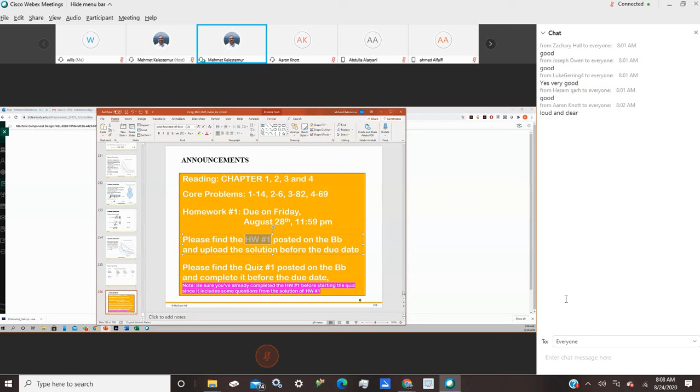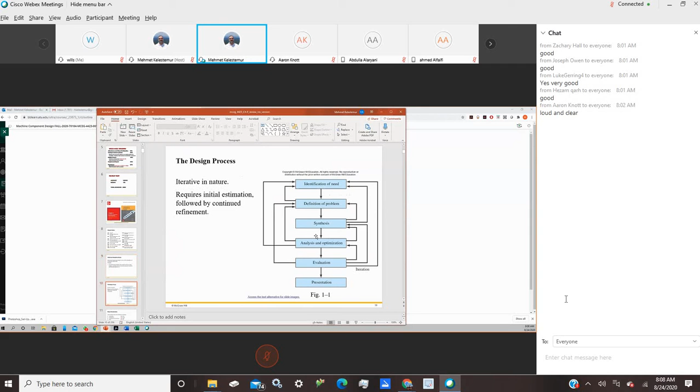Last time we started reviewing chapter 1, and we talked about what is design, the design process and design considerations. We talked about computational tools, acquiring technical information, and we mentioned some useful internet sites and organizations. Those are especially for the standards and codes, which are important when we talk about the components themselves. For example, bearings and gears already have codes and standards, and those are determined by some of the associations.

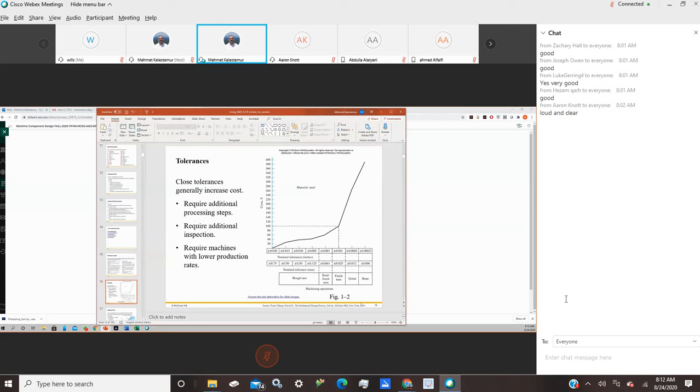So when you look at the, let me make it bigger. Okay, cost changes with the tolerances. And what we see here, this is the area, and in that particular level, let's say we use only rough turn, semi-finish turn, or finish turn. Those are the kinds of machining. So if we are not going beyond that one, then those are very rough machining operations, and the cost is low.

But if you go with grinding and then honing, then the cost increases drastically. The reason is you have to spend too much money on these machining processes. For example, engine cylinders, internal combustion chamber cylinders, need grinding and honing, and that's why they are expensive. But if you are using a component where the surface finish is not really important, unlike in an engine cylinder, then we don't need perfect finishing on that part, and therefore we generally see most machine components machined with those low-level operations.

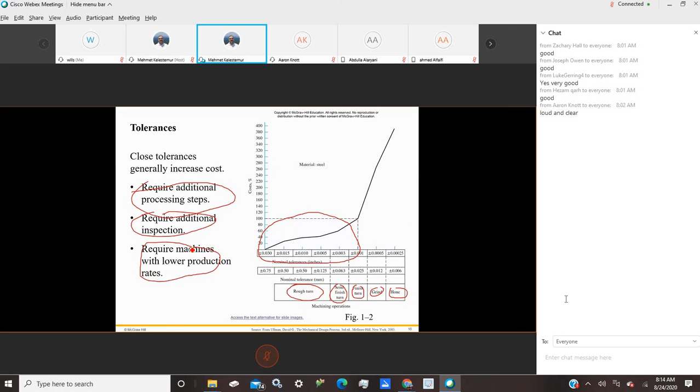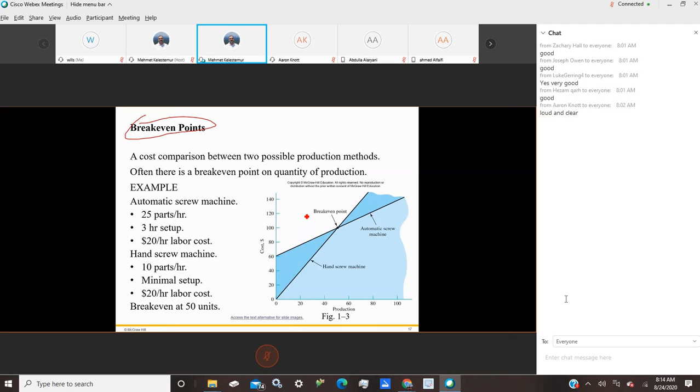And they require additional processing steps, additional inspection, and machines with lower production rates. So close tolerances generally increase the cost. That is one of the important rules. And another rule, break-even points. In manufacturing, we need to know how many parts we are going to produce or need. If the number of parts is not very high, then we don't need automated processing. Manual processing is enough.

So in this graph, what we see is the cost and the production, and in this,

could you turn off the mics? Okay, thank you.

That is the relation between cost and production, and this is an example for a screw machine process. Up to 50 parts is the break-even point. So until 50 parts, the hand screw is better. But if you need more than 50 pieces, then automated is going to be better. So there is always a break-even point in production, depending on the number of pieces. So that is another important issue in terms of the cost of that component.

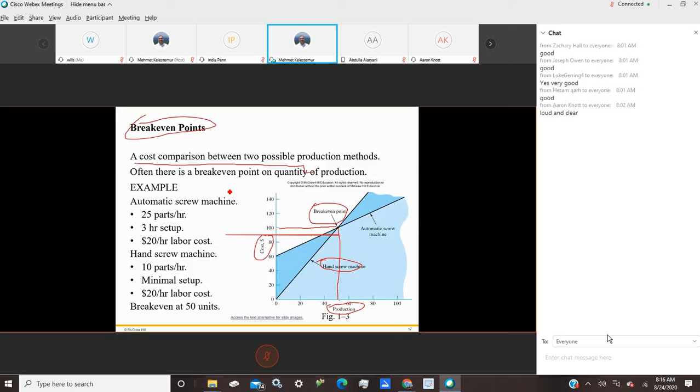And safety and product liability. This is another issue in design. The strict liability concept generally prevails in the United States. It is very important, and it is maintained by some regulations. This is very, very important. The manufacturer is liable for damage or harm that results because of a defect. So you need to provide the maximum liability for what you are actually producing.

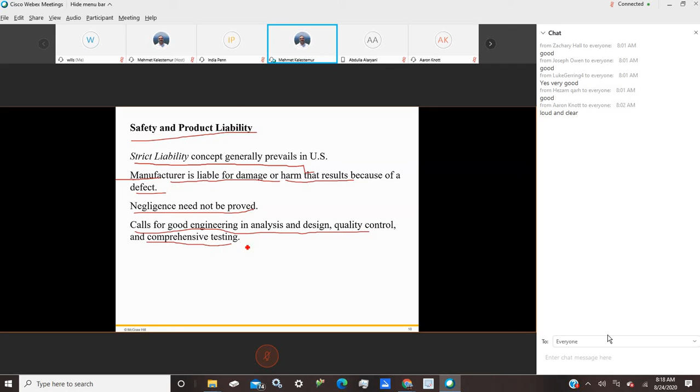Negligence need not be proved. It calls for good engineering analysis and design, quality control, and comprehensive testing. That means we always need engineering for any product. So it is not correct to make any design by trial and error. We need earlier work on that design and some analysis: material analysis, stress, strain, deflection analysis, and cost analysis. But in terms of safety and product liability, we definitely need stress and strain analysis to be sure. And this is very important.

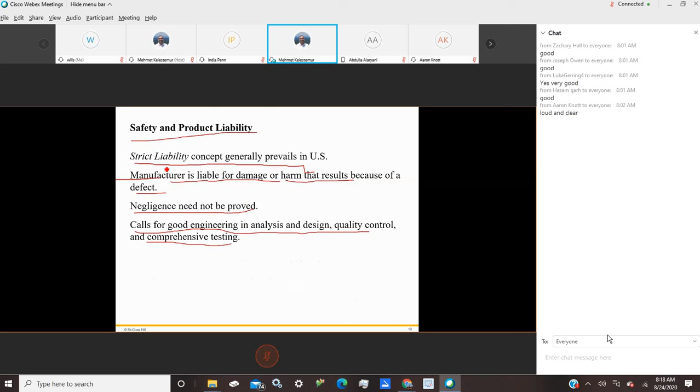Another two terms: strength and stress. Sometimes we confuse these two terms.

We intensively use these two terms. What is strength? Strength is an inherent property of material or a mechanical element. That means every material, for example steel or aluminum, and the type of steel or aluminum, every material has its own strength. That sometimes depends on treatment and processing, the way we are manufacturing this material. Those are all affecting the strength of the material.

It may or may not be uniform throughout the part, but generally in our analysis we assume it is perfectly done. In many analyses we say this is isotropic, a homogeneous material, meaning uniformly distributed, that all properties are the same in all directions. That is a kind of assumption. But in real world, nothing is perfect.

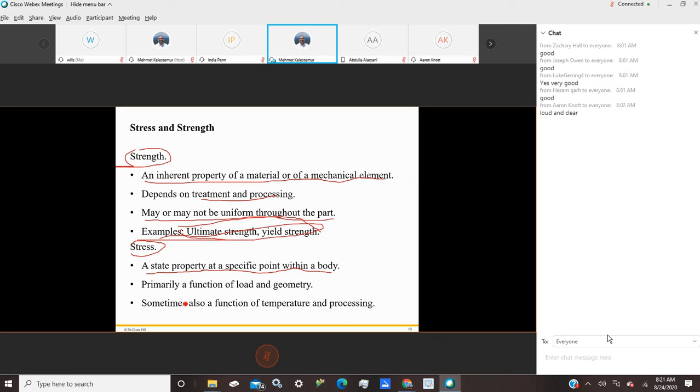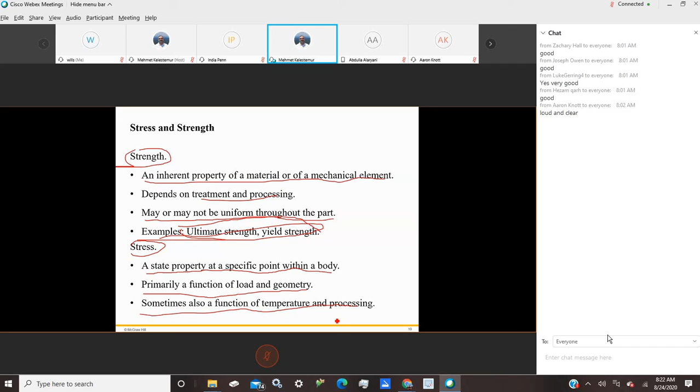Stress is a term we use, a state property at a specific point within a body. Let's say you have a piece of bar, a steel bar, and it has a strength, let's say it is bearing 100 megapascal tensile strength. If you are applying like 50 megapascal, that means that is the stress you applied, but the strength of the material is 100. So the stress is a state property at a specific point within a body, primarily a function of load and geometry, sometimes also a function of temperature and processing. This is defining what stress is.

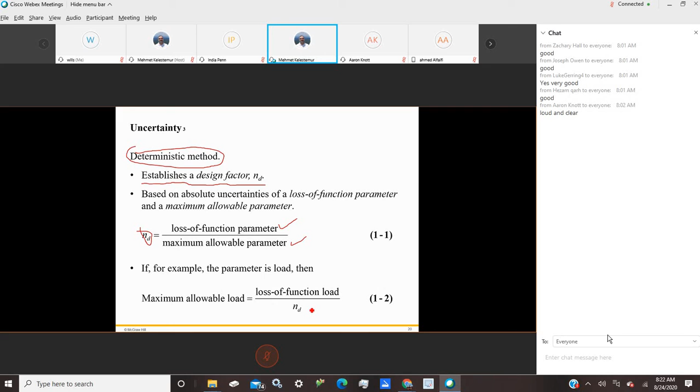There is always uncertainty, as we said earlier. One approach is the deterministic method, and the other is the statistical approach. Generally we use the deterministic method because we don't have enough data about those situations. The deterministic method establishes a design factor ND, which is the loss of function parameter divided by the maximum allowable parameter. For example, if the parameter is load, then maximum allowable load equals loss of function load divided by ND. This is the design factor.

The safety factor is another term we generally use interchangeably with design factor. The factor of safety is the realized design factor of the final design, including rounding up to the standard size or available components. We use factor of safety interchangeably with design factor, but there is a little difference. The factor of safety is the realized design factor of the final design, considering every aspect of the loading, so that is going to be final.

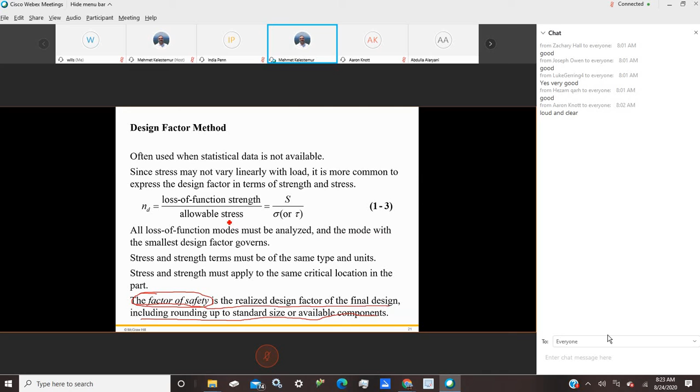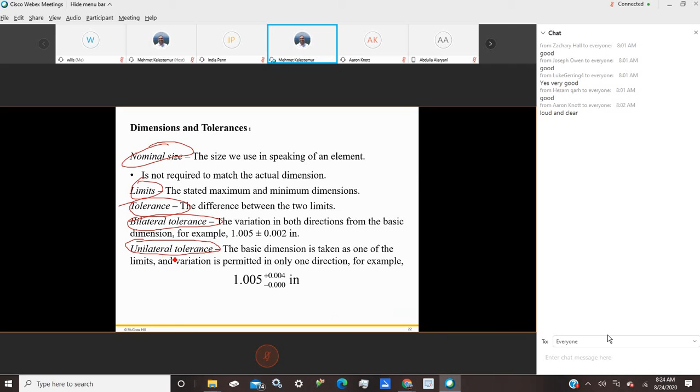Dimensions and tolerances, there are some terms in this part we need for later sections. Those are important: nominal size, limits, tolerance, bilateral tolerance, unilateral tolerance. We are going to use those, so please look at these terms again and remember them.

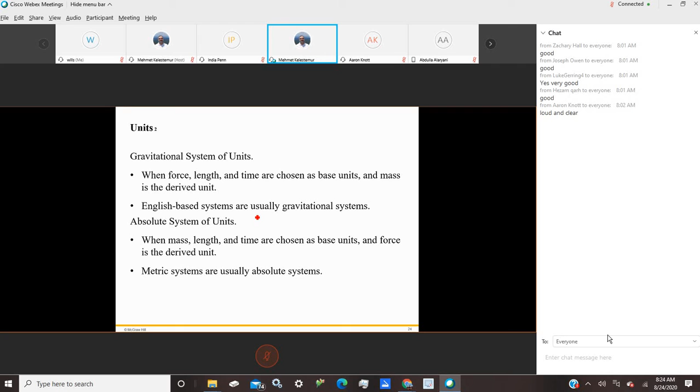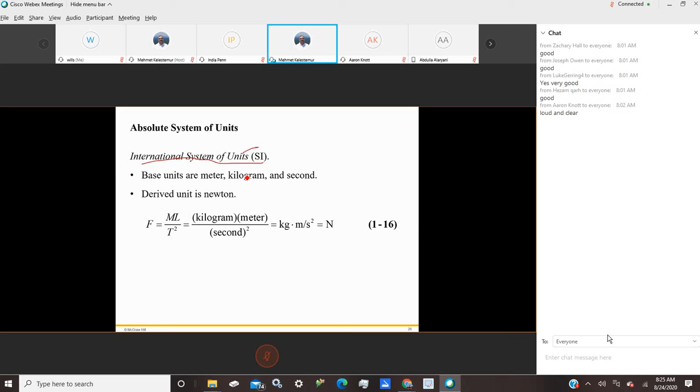And the units. At the end of the first chapter, we have two unit systems we are going to use throughout the book: the SI system and the customary system. The international system of units, which we call SI, has base units of meter, kilogram, and second. The derived unit is Newton, and the other parts are derived from that.

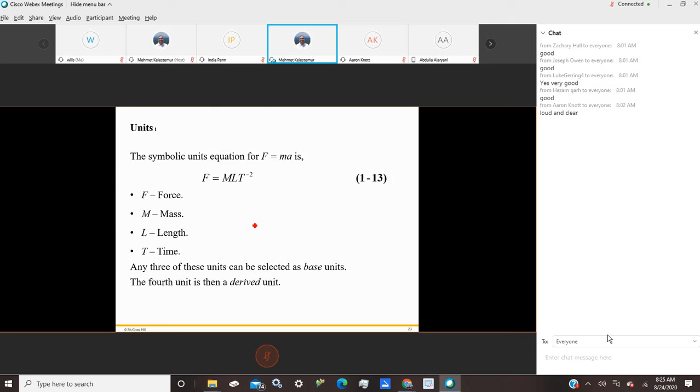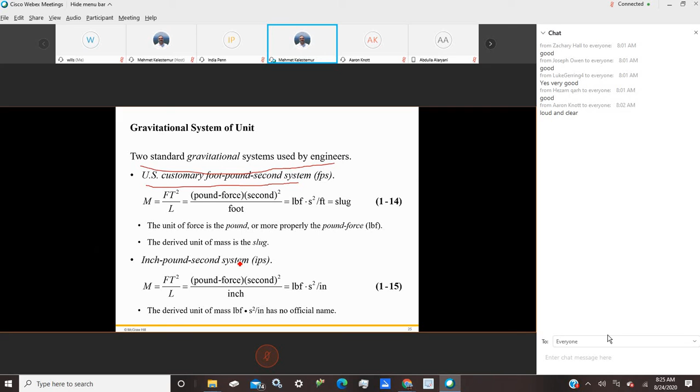The second one is the custom unit system, the US customary foot-pound system, which is the standard gravitational system used by engineering in this approach. I believe you are familiar with those things, please remember those as well. We are going to use both of them throughout the book.

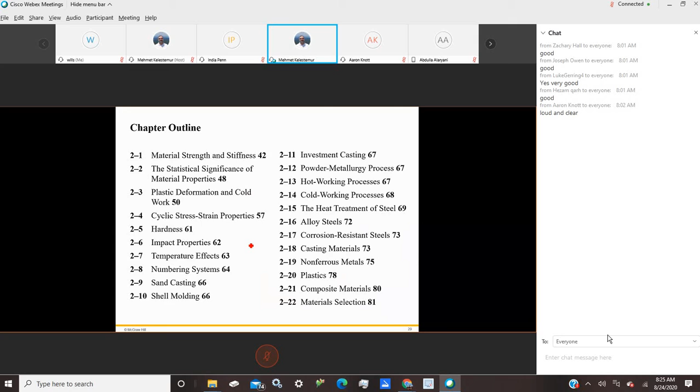The second chapter talks about material. As I said, in design issues, in our analysis, the first part we look at or consider is in terms of the material. So what should be the material point or criteria we need to know? In this part we learn the basic terms and parameters relevant to materials.

Generally we start with a tensile specimen. Tensile test is one of the common tests we apply to any material, might be polymeric material, metal, or ceramic. Those are the values or data we collect with the tensile test, and we determine the ultimate tensile strength of the material, the yield strength, the toughness, the resilience, or whether it is a ductile or brittle material. That information comes from the tensile test, and for the tensile test we need to know what are the...

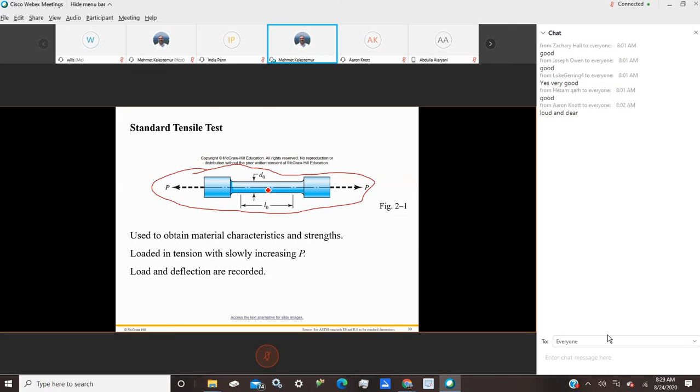Actually, in an actual test, that should change, because you are extending, you are applying P onto the specimen, and you expect there is going to be some contraction on the cross-sectional area. But if you are not considering that, and always keeping it the same as the original cross-sectional area, we call it engineering stress.

So that is engineering stress. If we consider it is not the initial area, it is changing, let's say to 9.8, a little bit less than the initial cross-sectional area, then I say this is something different than engineering stress, and I call this true stress. True stress and engineering stress are different from each other.

Generally, if you consider the stress strain curve, and if you are in the elastic region, it is good to consider the original cross-sectional area. But if you are working in the plastic deformation side, it is considerably higher, so you cannot ignore the momentary cross-sectional area. You have to always look at what the cross-sectional area is momentarily, corresponding to the stress level.

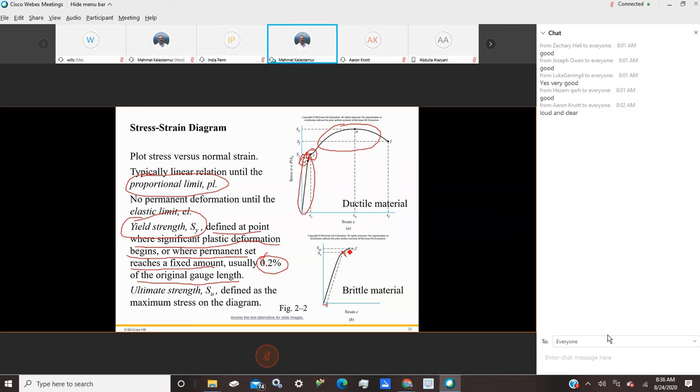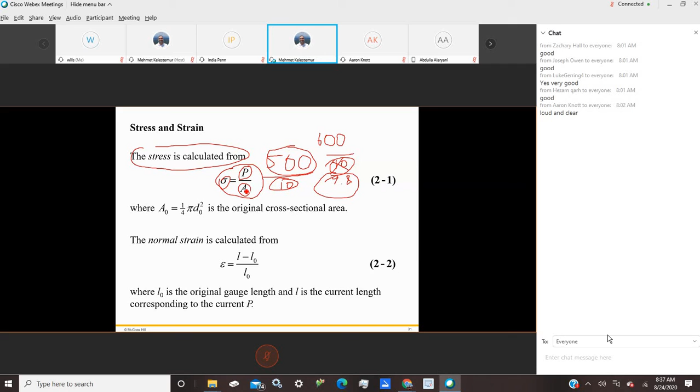So if you put this 0.2% here and draw a line parallel to this change, eventually it will cross, it will intersect the curve. So this point is defined as the yield point, and the maximum point we obtain, we record, that is called the ultimate tensile strength point. So here it is the ultimate tensile point for this curve. Actually, this point is having much higher loading, but as we define engineering stress and true stress, if you consider always the original cross-sectional area, it is going to be something like this.

But if we are going to consider what is the momentary cross-sectional area, then that is going to be the true stress versus engineering stress. This is for original cross-sectional area, this is for momentary cross-sectional area.

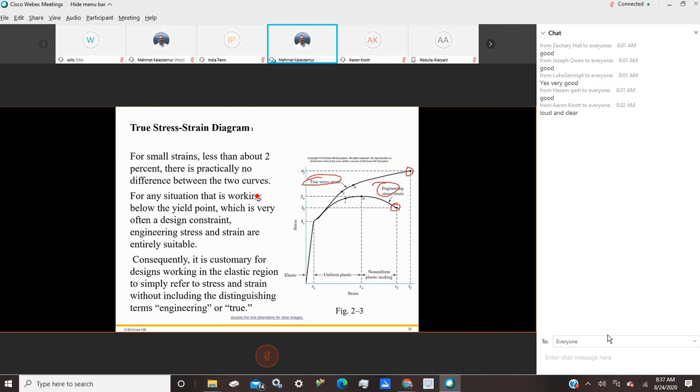And the equations here, what we use: sigma equals P over A0, where A0 is the cross-sectional area and P is the applied load. If it is a round specimen, then the cross-sectional area is 1/4 pi d squared. It is not necessarily a round specimen, it might be a different triangle, square, or rectangle. So if you have a rectangle specimen, then you need to again define what is the cross-sectional area for that one. So this formula is good only for round specimens.

And the strain is defined as the final length minus the original length, the difference between before and after loading, divided by the original length. That is called strain. So therefore there is no unit for this one, because it is length divided by length. So the strain does not have a unit, but this sigma, that is P over A0.

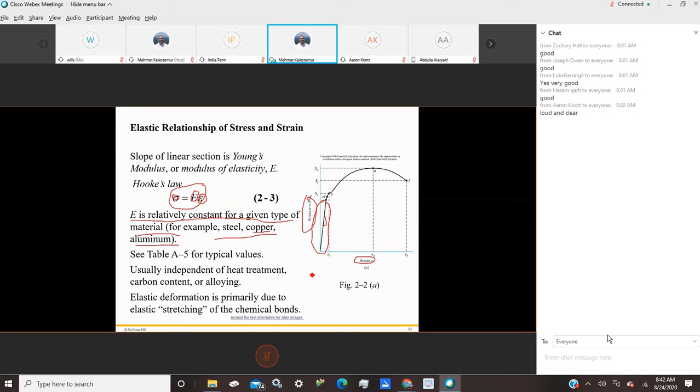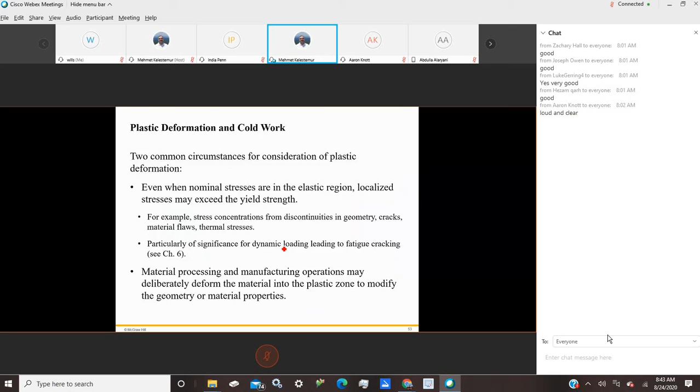Another important issue here, which we are going to use in our calculations, is stress or strain hardening. Sometimes we call it work hardening. So if you are applying some stress and you are over the yield strength of the material, the yield stress, then imagine this one.

So you are extending the specimen and you are exceeding the yield strength point, and then coming to one point that is not still the ultimate tensile strength of the material. At that point, you remove the load. When you remove the load, you have some permanent deformation, but the material tries to go back to its original shape, but it cannot because there is some permanent deformation. So this is going to be plastic deformation, and that is the recovered elastic deformation.

And if you try to have the same tensile test on the specimen that already had some tensile test, it is actually not the same one as the original, because we induced some plastic deformation on this material. We created some permanent deformation on this material. So when we pull this material again, the yield point is not going to be the same as the earlier one. So we call it cold work, or strain hardened, or hardening of the material.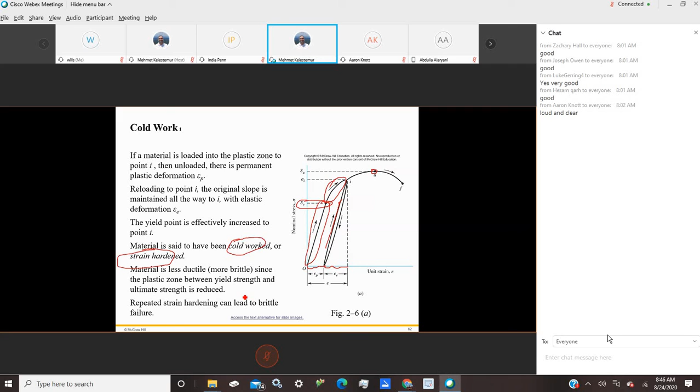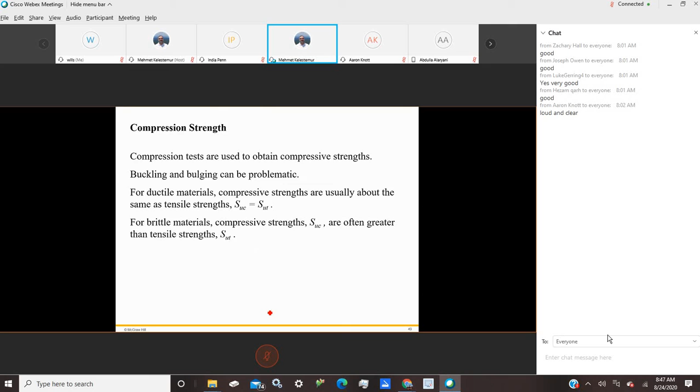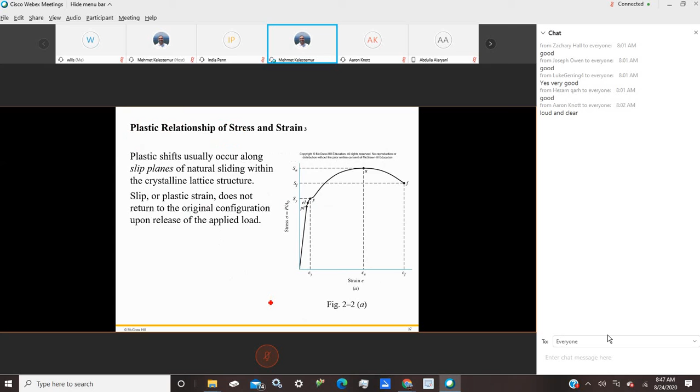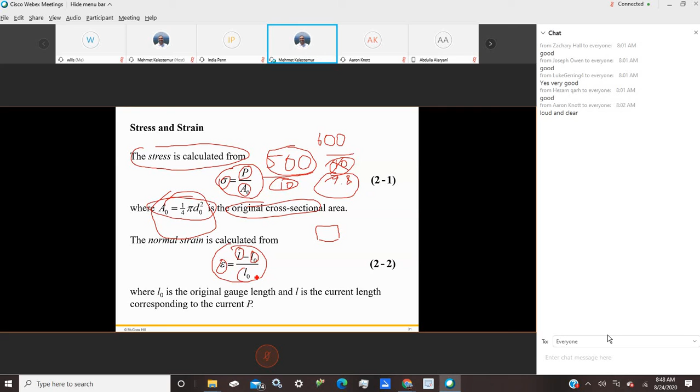So it is also associated with the motion of dislocations, as we talked about the plastic deformation of material. In that part, we need to remember also what is the true stress and true strain. I partially talked about that, and the momentary cross-sectional area is considered. So true stress is based on the actual area corresponding to the current P. And true strain is different than the engineering strain. Engineering strain is already defined here as L minus L0, the difference between the length before and after the applied load, divided by the original length. True strain is ln, the logarithm, of L, the final length, divided by L0, the initial length.

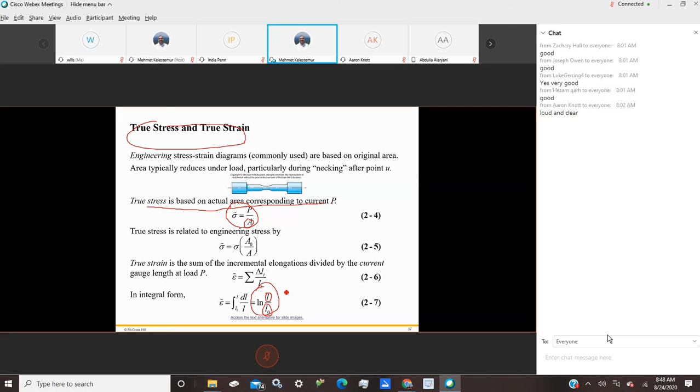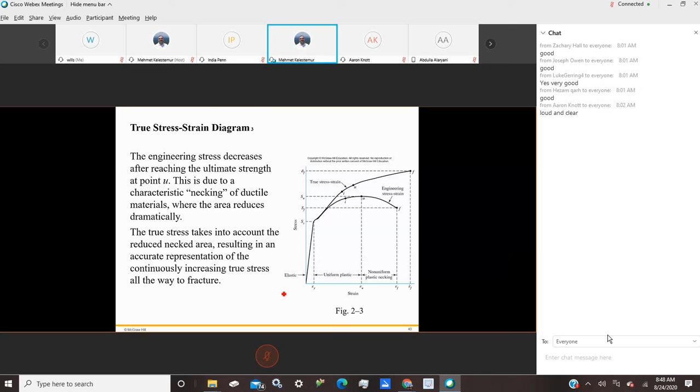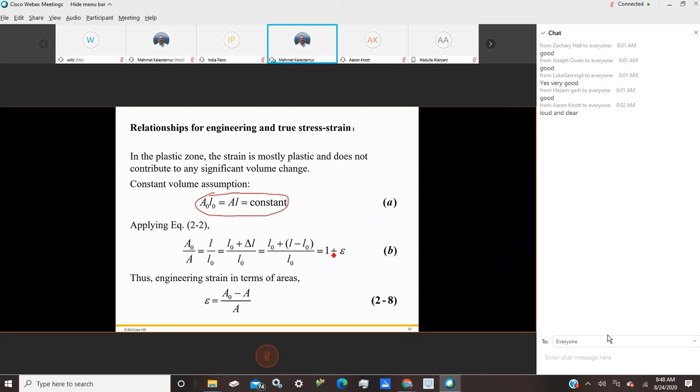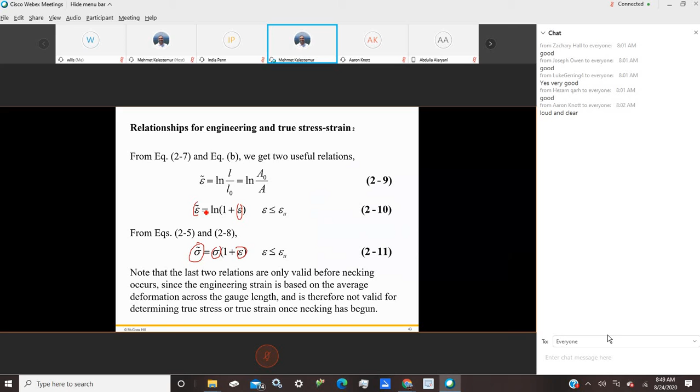And there are some relations between these two. So if you know the true stress or true strain of the material, then you can easily get the engineering stress and engineering strain. So here, if you consider the volume is constant before and after the deformation, there is a relation between the true stress and true strain. If you know the engineering strain and engineering stress, you can get the true stress. And if you know the engineering strain, you can get the true strain.

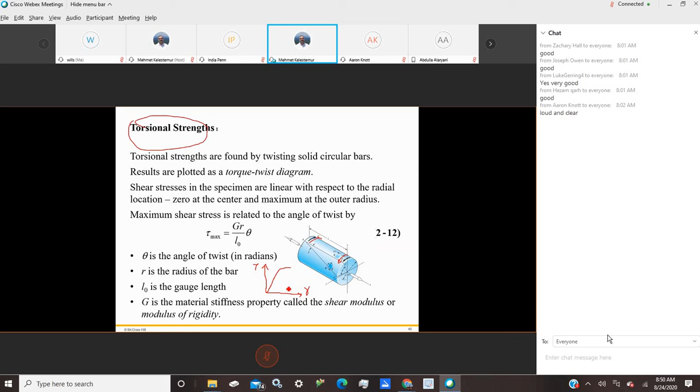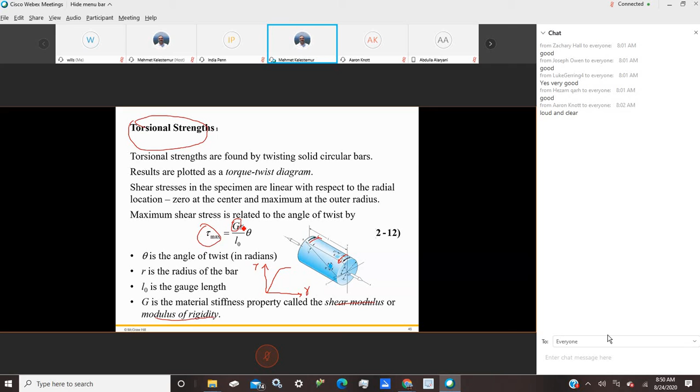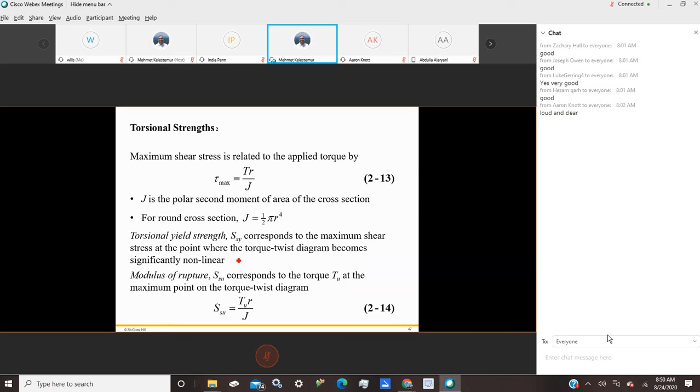Another point here, torsional strength. It is very similar to the stress-strain or tensile stress curve, but here we are applying a torque, trying to twist this material, and it gives a very similar graph to the stress-strain curve. At the beginning it is linear, then non-linear, but here that is tau, the shear stress, and here that is the shear strain. So when you consider shear stress and shear strain, we have this equation, but in this equation we define G, the shear modulus or modulus of rigidity, instead of Young's modulus or modulus of elasticity. So it is very similar, and that is another important parameter we are going to use later.

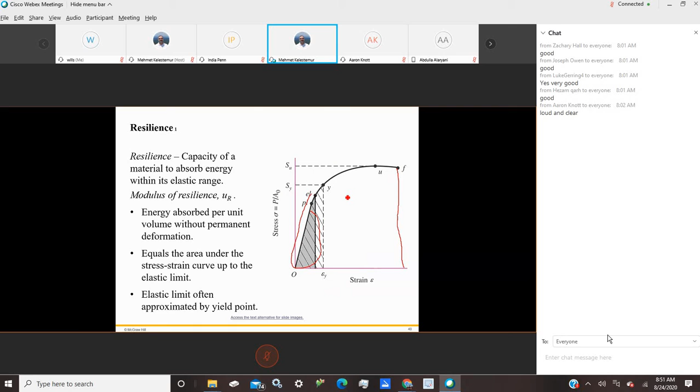Resilience and toughness. Resilience is the capacity of a material to absorb energy within its elastic range. And toughness is the capacity of a material to absorb energy within its plastic range. So the entire area gives the toughness, but only the elastic region gives the resilience. So I will stop here.